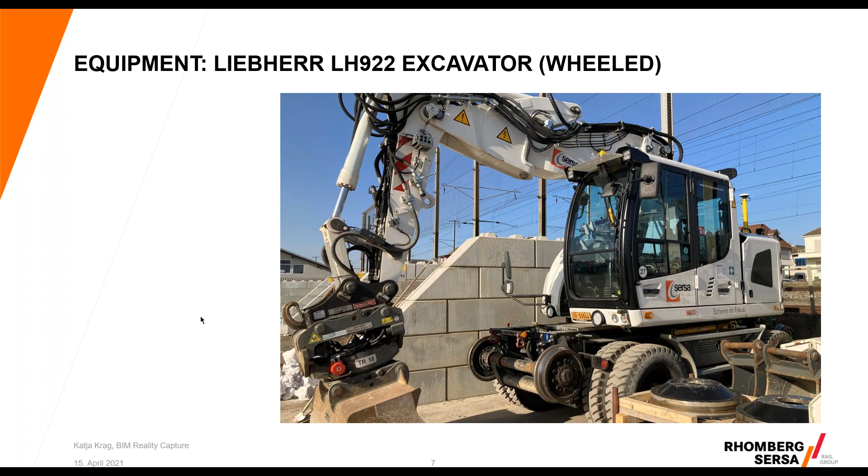And as you can see down here in the picture, this part here goes onto the rail. So these excavators can run either on the rail or on the surface. And you need to have special licenses to drive these machines, as you could imagine. So we have 2 of the wheeled ones, and as well we have the Leica iCON series GNSS, which you can see here very small on the picture, on the left-hand side, to do the as-built checks. In this case, this machine is not equipped, so they go with the GPS, do the as-built checks and tell them, hey, you have to go higher or deeper.

So a short overview of all our equipment: as I mentioned, we have the compact track loader with the Leica system. We have 2 wheeled sleeper excavators with a mobile Novatron system. We have 2 tracked sleeper excavators with a mobile Novatron. We have a small Wacker Neuson excavator, also with a Novatron system on it. And we have another excavator, a Liebherr 922 with a Leica system with GNSS on it. So all the excavators are only running with GNSS. And we have 4 Caterpillar excavators. They will be installed during the next 6 months, I would say. One is still in the factory, but the other ones are already operating out in the field.

As well, we have a milling machine, a Wirtgen W200H, and this one is also equipped with a Leica system and can run with either GNSS or total station. And then we have our famous W Plus machine. That's a special machine, somewhat our own development. The full steering of the 2D is coming from our colleagues, and the 3D part is done by an external company. On the sensor side, we have the GNSS or the total station from Leica, the iCON series. In addition, we have 4 Leica iCON total stations and 6 Leica iCON GNSS, and all that equipment is running somewhere in Switzerland. So that's also something you have to keep in mind. We have all these machines and they go from A to B very fast sometimes.

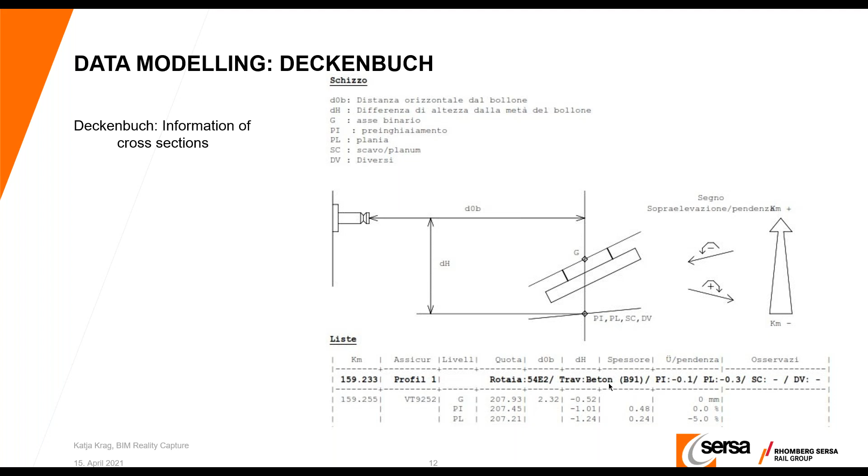So inside our BIM team, we have some modelers, and they are creating these different layers. As mentioned, we have the axis information coming from Topo Rail with the fixed points. They're not doing anything, they only convert it to LandXML because it's their own format. And they have the cross sections and information. The background map will also be cleaned and converted to a proper file so it can be used on the machines. Otherwise there's too much information and you cannot see things properly. So it also depends on colors and all these things.

So the output from the data modelers is still the axis, which will then be in LandXML format or DXF, one of these. Preferably, we like to go for LandXML. So this axis will also be converted during that time. As well the fixed points, as I mentioned, and also the background map is cleaned. But we need the layers.

So what we do is, as you can see here, B3 is the top of the rail itself. B2 is the sleeper, which could be wood, concrete, or steel, for example. And then they have to define layer B1, which is the ballast layer. Out of that one, you get the subgrade layer, and so up and down. That's done by our modelers in the BIM team or somebody from the surveying department we have as well.

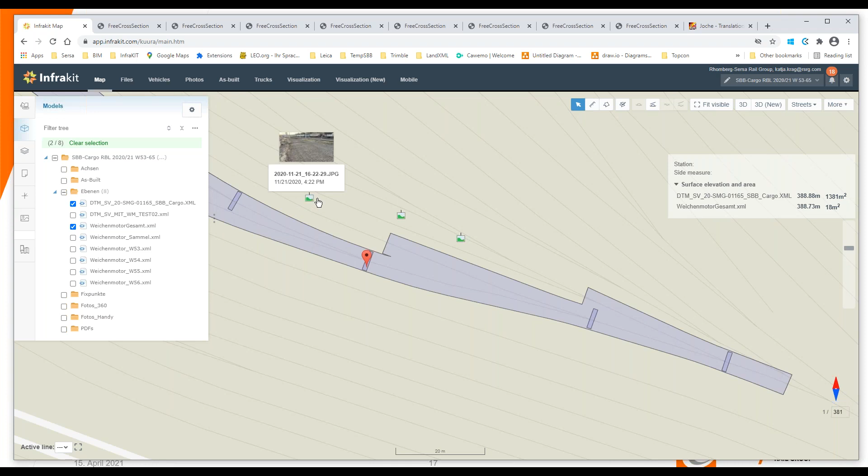I can show you some pictures here. Which one was it? So we go for this one first. As you can see, this one goes lower. The issue is they put in the engine here again, and then the ballast at the end is one surface. And I guess it was this one. So you can see properly it's only this part, and here normally the rail goes continuously through.

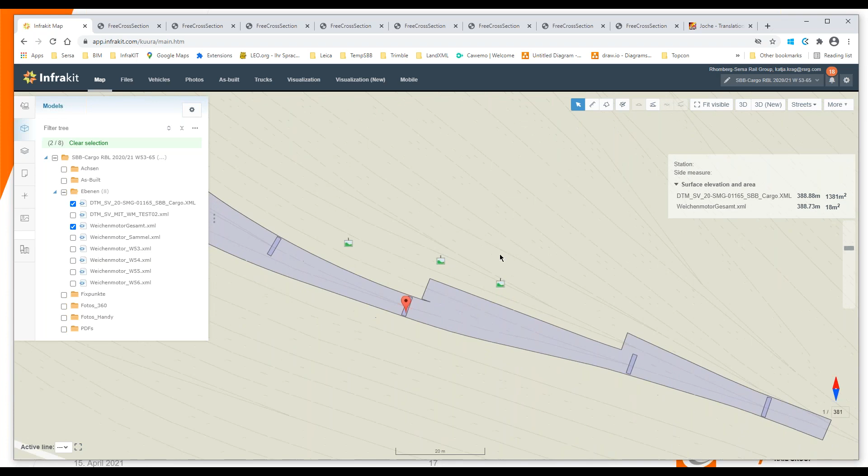So, as I said, we do this for the cross checks, for example. I'm not doing this in this project. I changed the project now to another cargo job site, which is close to Zurich.

And here you can see as well, the project is already much more complicated. This job site was done with our W Plus machine. This machine can remove the ballast, cleans the ballast inside the machine and puts it directly back in. So it's one step, and I guess that took 2 night shifts or something like this. And now you can see you have already 6 axes plus all these things where you get the turnouts and everything.

So, do I do a cross section or not? No. So this is how it looks in this case. The task for the foreman is now he's got all these axes here, and he can check and measure from the axis, for example, down here. So it's 44 centimeters, and then he needs to know what kind of sleepers do I have in there and everything. So can we do that or not? And that's where he has to shout, hey, that's working or not working.

The data handling for this W Plus machine is very different than we have for the excavators, for example, because the machine is working along an axis. So he's selecting an axis and then he goes there and runs it. This is also why we have all these different axes in here, and all the different surfaces. But actually we have a workaround now because we decided to put everything in one model, but depending on how we designed the software, you only grab the axis and the software grabs directly the models to it as well.

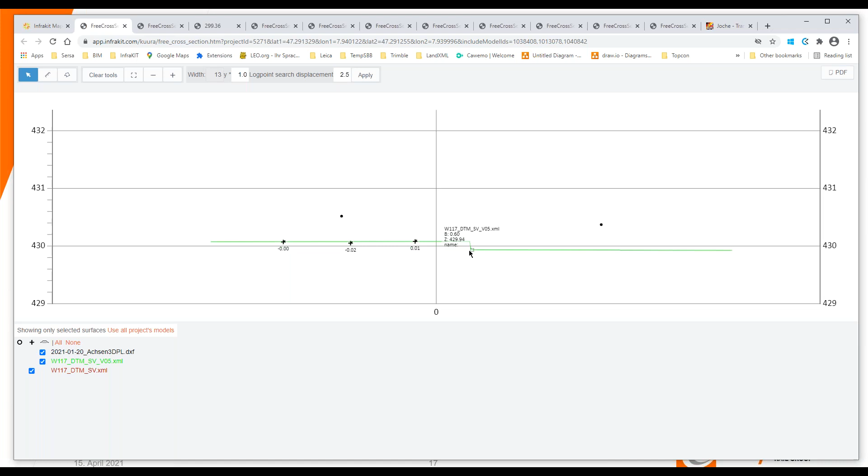So another challenge, as you can see, that's only a small list of my projects. I have a project in Zofingen, which is already done. That was the first model which was done, and there we had this issue, especially that the surface didn't fit. If I show the cross section here, it looks fine in this case, but moving forward, hang on. If we go here, for example, then you see these jumps, and they are not allowed here in Switzerland. So the model needs to be changed, and it would have been worse. Before, this model on the left moved over more to the right, and this one moved over. So this is already the second version we did.

You can also see the known points here. For example, if I go here, we get the information. Okay, that's one of the fixed points. Its name is 33 because it's the mast 33. So you have all these points in there. And because of the code 305, we know that it's one of the masts, as an example.

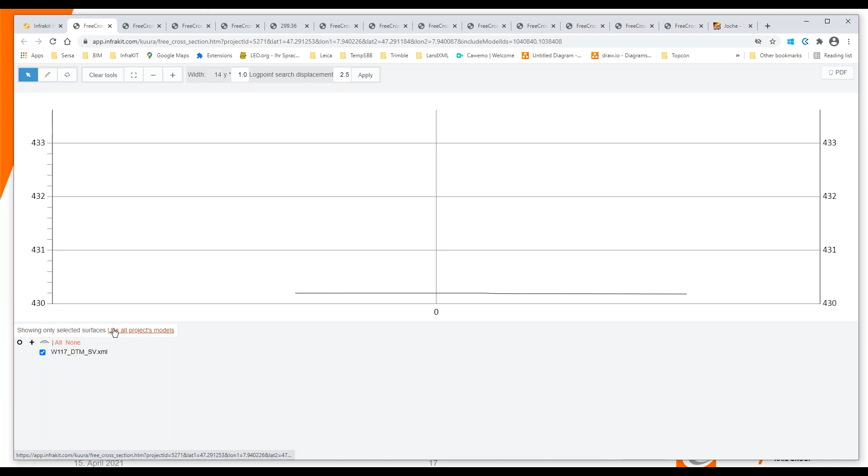So at the end, we changed the axis to a proper LandXML axis. And I remove the model here and take this one. Now if we go here and check the model, it looks different. I haven't selected any axis. And if I go in here, you can see what happened, it's now very smooth. This is how it has to be for the machines, because the machines running afterwards, the tamping machine, also need a proper surface before they can go.

So last but not least, that's all the normal gauge systems. I'd like to show you how Luzern looks, which is now the big project we are doing, and we just received some data yesterday. That's the central station here, and it's nice there because you have the lake directly beside, but you don't have time to go there. So that's all our known points. We have some parts here. That part is already prepared, but needs to be cleaned as well.

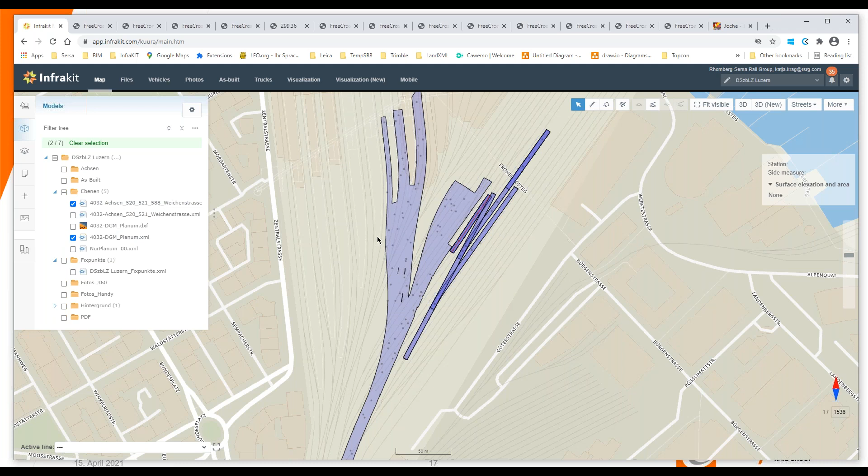Yesterday I just received some data for that part, and if I switch that one off again. In this case, we are not responsible for the data, that's done by external people, but you can see already we have these different layers overlapping, and we have only one axis inside. So we need a cleanup of all this data now, and I need to talk to these guys. So this is how it looks.

Now you have to imagine the foreman has to think, okay, that's my axis, that's my offset, and I have different surfaces underneath. And I just learned yesterday on this project, in this part here, they have 4 or 5 different profiles, depending if it's normal gauge, narrow gauge, if it's on a turnout, which turnouts, which sleepers are used, and so on.

So, that are most of the things of the challenge. So I'd like always to come to the end of my presentation.

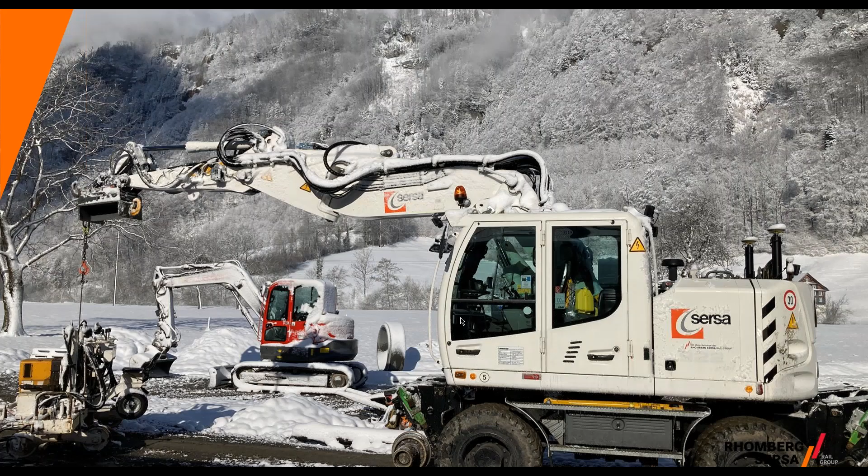Sometimes this is how job sites look like here in Switzerland, but I imagine in Scandinavia it's similar. This happened just overnight, from Easter Monday they had plus 15 degrees, and the next morning it was minus 7 with snow.

Leica is a very old organization. Here you see some history - it basically started with Kern, a long time ago. But Leica itself originated from Wild, and as you see, it was established in 1921, which means this year we're celebrating Leica's 100 years of existence. So there will be a big party by the end of this month. Hexagon is a little bit younger, but today we are pretty big - worldwide more than 21,000 employees, with Leica being one of the biggest working companies with around 4,000 people. For the Benelux, I have around 65 colleagues, some in sales but a lot in support.

I'm first starting to focus a little bit on the products. We produce quite a lot of products which are used in machine control or heavy construction environments. First of all, the easiest ones, which you can buy on the website from a lot of shops, are the DISTO products. It's a measuring tool used for measuring distances or setting out, so it's a lot used in building and construction.

Then I think one of the most known are the Captivate solutions, which surveyors around the world are using. Our most interesting one nowadays is the GS18i, the newest one, where you can not only measure, you can also tilt the pole, but also take images which you can use to collect data and measure later on in the pictures.

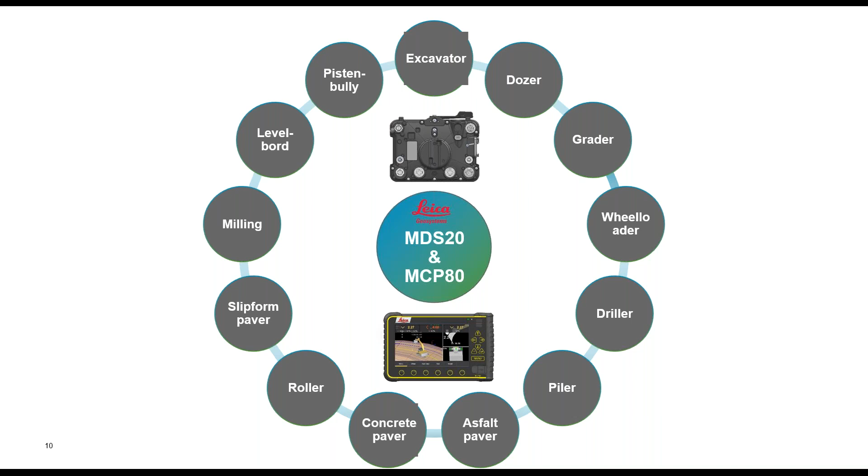If we go first to the machines, I think the most interesting part is that we have one docking station that fits on all types of machines. And on that docking station we have one panel. That panel can be used on all types of machines running all the same software, which means we can have excavators running with the MC1 software, and dozers running with the same kind of software. You can easily change the panel from one machine to another, and it automatically recovers all the settings from the docking station. So even if it's a new panel, it automatically retracts all the settings and calibration data from the docking station itself.

So all this type of machines - you see here the wheel loader, which is not commonly used around the world for excavating, but in the Netherlands and Sweden, the wheel loader is more and more used instead of a grader, so it's a very common machine in our earthworks. And then the piler, the drillers, but also asphalt machines and the skid steers, as Katja also showed.

What do we install in an excavator? Well, first of all, we install sensors, and these sensors are not only measuring the angle but also the accelerations, to correct for sudden movements and stuff like that. On top of that, we have the docking station where we put the panel, and we have GPS positioning, but it can also be a total station if you want, to have the global position of the machine.

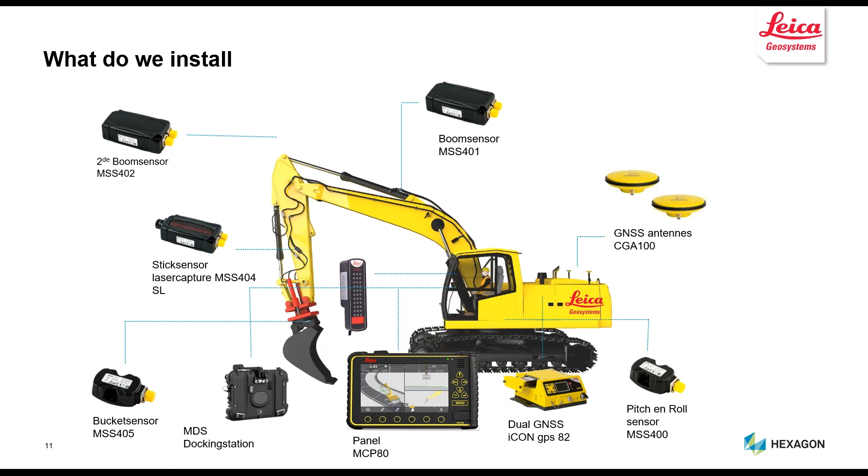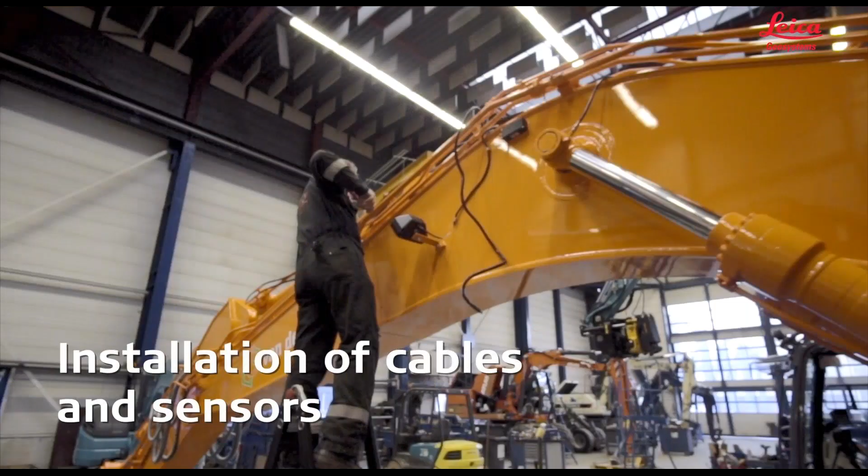And here we have a small video where we are already installing it - unfortunately, no sound for you. But here you see the whole process of what's happening. So if we get an order, we go install. Nowadays it's more and more at the location where it's a new machine, where we do it at the dealer itself - in this case it's a Kobelco dealer. We put on all the cables, all the sensors.

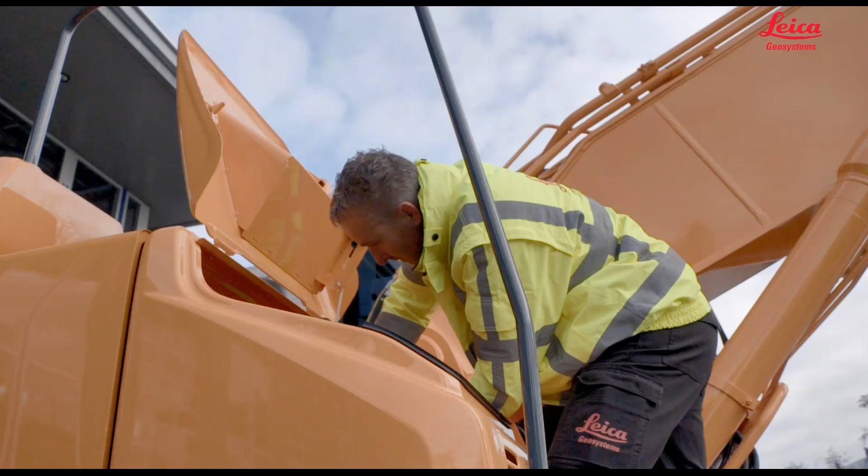Here you see they start measuring the system. We do that always with prisms on the machine. We have a special software for that one. It's called the Icon software, but there is a module in there where we can calibrate the machines and get them as accurate as possible. And when we're done, we put a sticker on it.

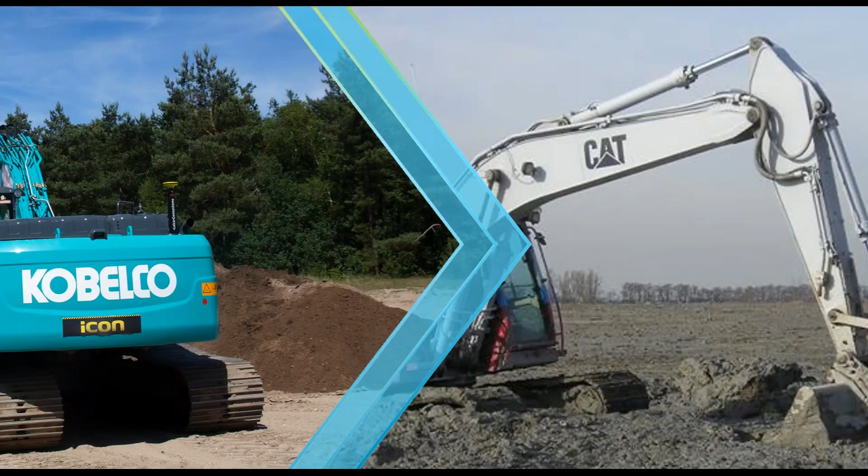Yeah, okay. Here comes the support. I'll come to that later on. So in the old days, we were doing like this. We had a surveyor staking out all the points, and nowadays we're moving towards having the system on the machine where the operator can see everything he's doing. Yeah, and we don't need a surveyor on the job anymore.

It's the same when we go, for example, concrete. In the old days, we were all putting on strings to set out where they had to go. And the strings are always a lot of work to put up, but they're also a risk because someone tumbles over it. And nowadays, what we try to do is do it with total station, and here it's a one setup, so you can even run it in combination with GPS. And these kind of machines are running now without any string in the field. And that's something this is also put on other machines.

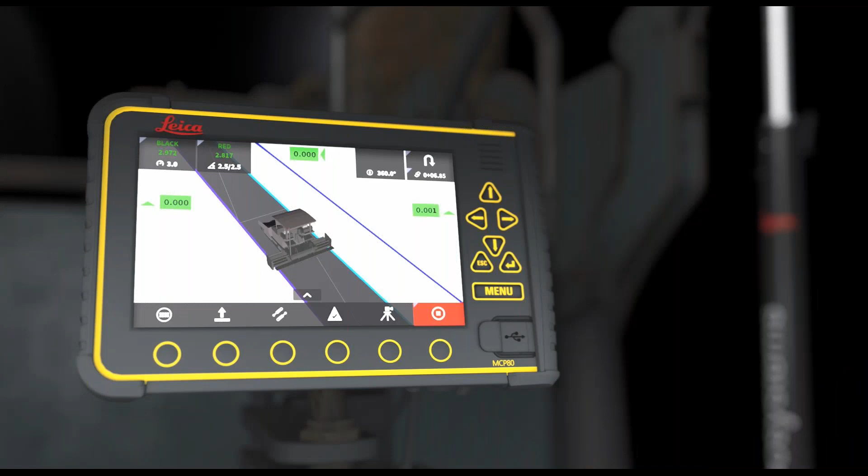So the same software, the MC1 software, can be used on concrete pavers, asphalt machines, and also on milling machines, where we are running these virtual string lines, which we can make in the office and send them to the machine. And the string lines on this kind of asphalt machines are not only used for the height, but you can also use it for the direction of the machine. So it's automatically steering if you have a Vögele machine, and it's also automatically adjusting the screed width.

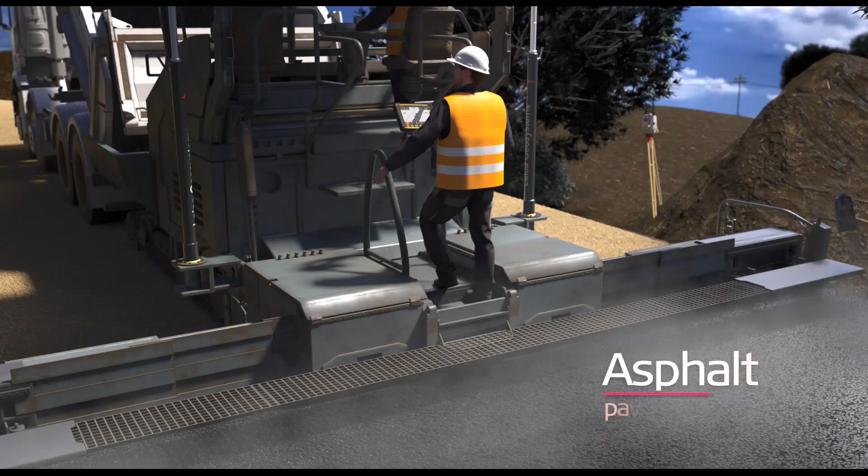So you can create the model, put it in the machine, and then let it completely run automatically and adjust all the heights. And as you see, you can use it with one mast, but that's only for the smaller machines. But most of the time they're using it with two masts, so you have also the direction set. So here they're going to show you that they have a wider setup, more than 6 meters, at least two masts for the accuracy.

Okay, then we come to the next product, which is called the Pegasus. So if you want to measure the as-built before, for example, you start to do any new design, or you want to measure as-built or your clearance of roads or whatever, you can use the Pegasus system. And this one is collecting a lot of data, really megabytes of data. So it's a scanner on board together with cameras, which makes it a complete point cloud, which can be used to measure volumes, to make your design, to see if your design fits in the actual situation.

And we have really customers using this on a daily basis where they run over the project to monitor the progress, to see the volumes, to calculate it from there. So instead of using a drone, you can also use this kind of machines or kits to do this kind of as-built checks. And here it is how it looks like.

So on the left side, you see the picture where they measured it, and because of the cameras we have, you can collect all the data colorized, and you can measure details inside it. Even though you're driving maybe with your car up to 60-70 kilometers an hour, you can still have an accurate position of 1 to 2 centimeters. And that's the absolute position; relatively, you can have it even more accurate. So you can measure cracks in the road to see the size, without being on the road itself.

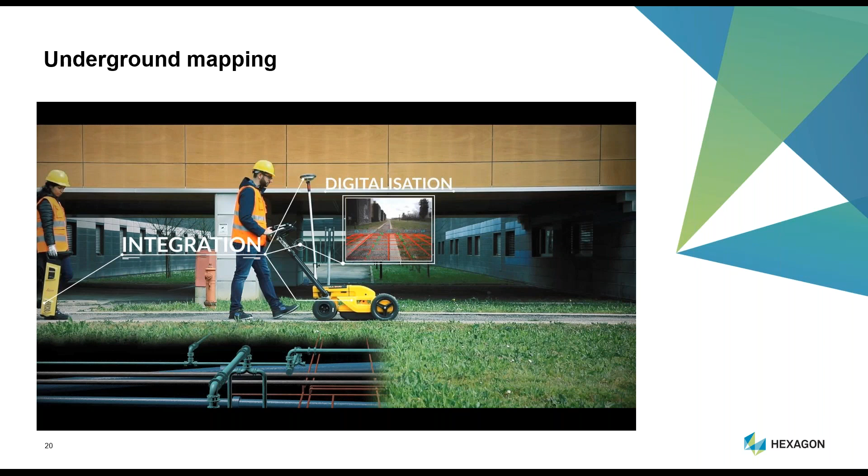Then we have the underground mapping. So we have the ground penetrating radars. We have different ones, and some of them, even the DSX, are made to work together with machine control. So you can measure and see what's in the underground, and then directly upload it to the machine. So if you found a pipe or a cable which has to be protected, you can directly upload it to the machine as an avoidance zone. So the operator gets a warning the moment he gets in the neighborhood of this pipe or this cable, so you can be more careful and not hit pipes and underground infrastructure.

Then we come to the Icon and Captivate lines. So we have two different lines. Captivate is designed for surveyors and is capable of doing everything a surveyor wants, while the Icon line is made for professionals working in building environments who need to do measurements. So it's completely different software running on it, but it is made for people who want to measure and stake out in building construction or earth moving. And the good thing is both of them can be used together with Infrakit. And now we get a short video with an overview where you see how it is all connected together.

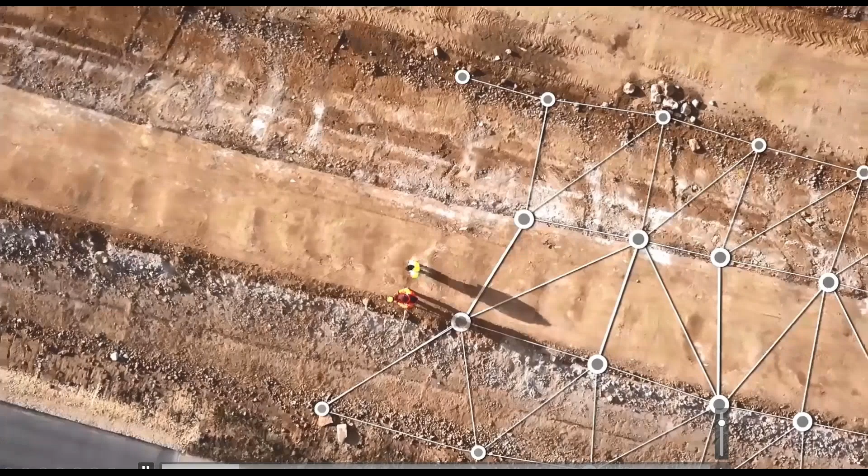So we see the excavator running on this model. We can see the GPS, where you can use it as a base station, where you can use it to measure the points as-built. And all that can be combined later in the office.

What is all connecting us? Yeah, so inside Leica we got ConX, and ConX is our cloud data synchronization system. So all the equipment you saw can be used to upload data, but not all of them directly. Some of them you have to be in the office, like the Pegasus. That data is so huge, you have to work on it. But all from Captivate, all from MC1 systems, everything is connected to ConX. And ConX is our cloud service, where you can upload models, visualize models, and download models to the machine.

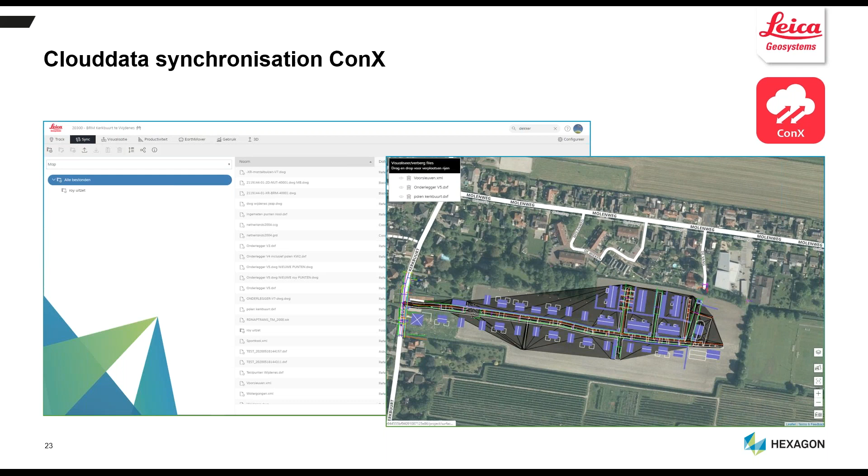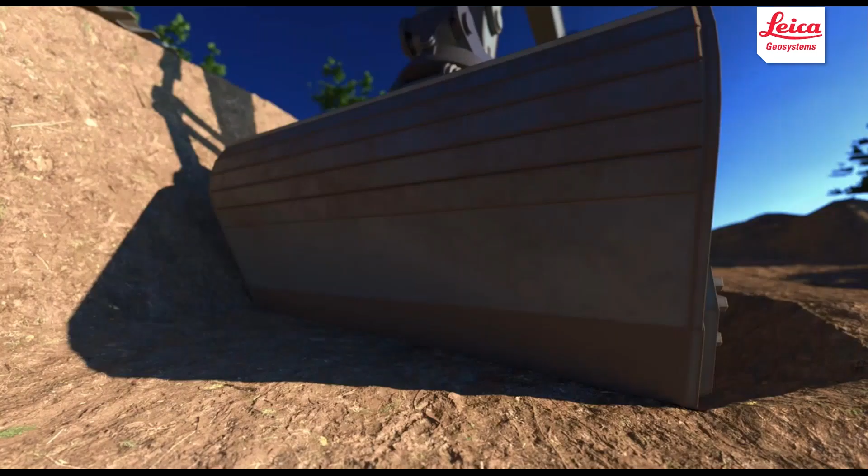And that's what we're showing now in our movie here, the seamless integration. Yeah. So data which is stored on ConX will automatically be synced to the excavator, but can also be synced and downloaded to the field controller and can upload it. So if an operator measures points as an as-built, like he's doing now with his bucket tips, that one is automatically uploaded to the cloud or shared between other machines if you want. And in Infrakit you can use this information, but I can do that later on.

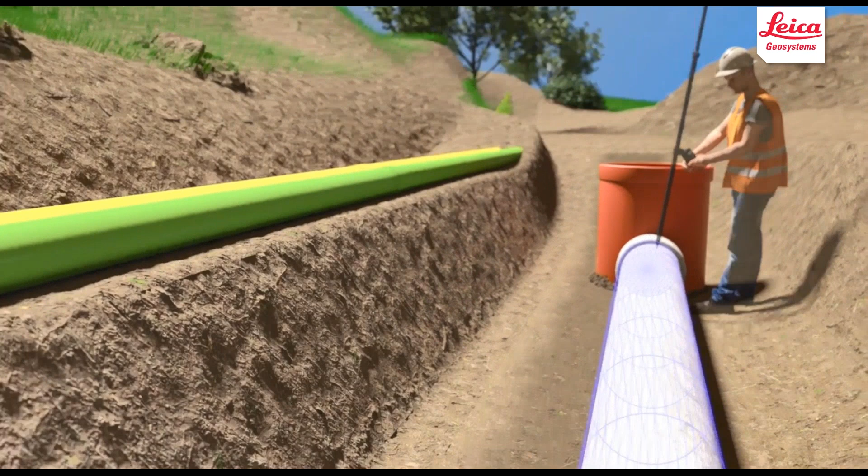And Leica is always using open standards, so we don't have to use the Leica format. We can use LandXML to be uploaded to the machine, and you're directly working on that one, or you can even use DXF files to work on that directly. And that's from the Captivate, from the iCON side, from the MC1 system.

Okay, so what you see, from design up to the maintenance, we can use ConX to connect to our machines. But we also know that on the job site, it's not always Leica. Something we do hope, but it's not always like that. And there, I think Infrakit becomes a major cooperation partner for us. Where ConX is just syncing files and downloading, upgrading, Infrakit can do more, and they can also connect others to it.

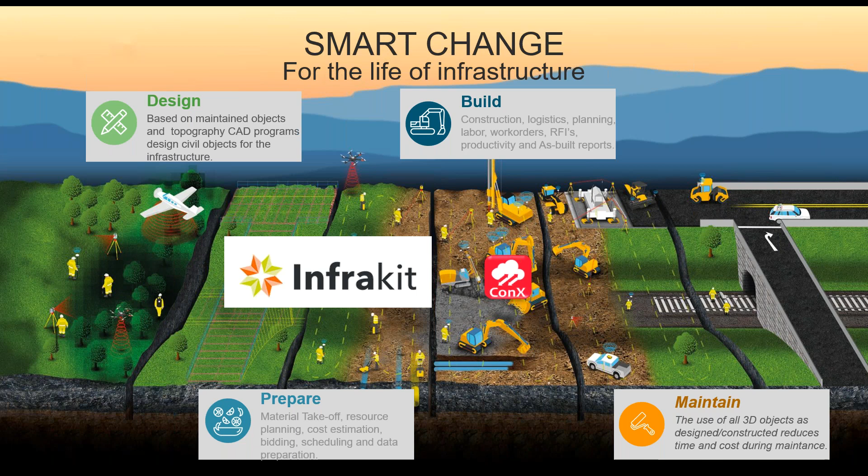So in the complete workflow, we have the design we put to the machine or anyone outside, and it can also be the foreman measuring things. Then we get the as-built data, and that all is collected together, and it's a kind of circle going around. And that data you can design and create in Infrakit, move it to ConX, sync it, and from there it's coming to the machines automatically. And that's what a lot of customers in the Netherlands are doing.

For example, Heijmans, a very big contractor in the Netherlands, they're using Infrakit on a daily basis, where they connect not only their own machines, but also machines from subcontractors, and they're working together. They use auto logging options in the machine. So the operator is trained and forced to measure everything he's doing. And some of them, because they're doing it so often, asked us to put special buttons in the joysticks to make the measuring a little bit easier.

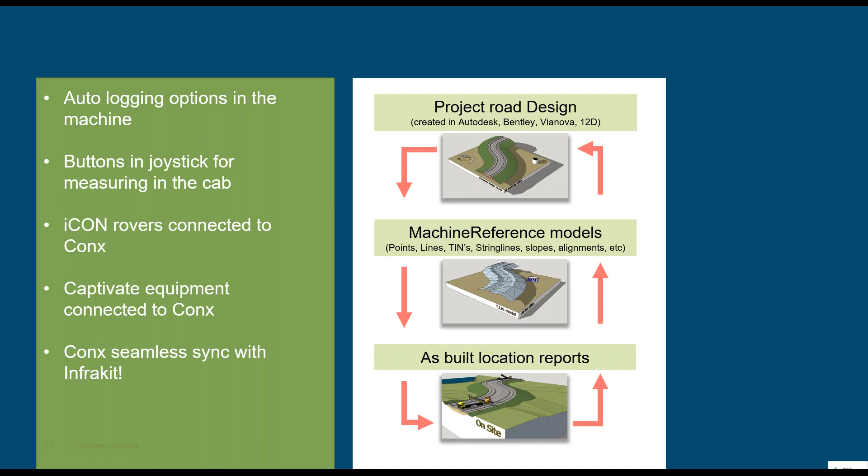And all iCON rovers or Captivate rovers can be connected to ConX. And from ConX, there is a seamless sync with Infrakit. So there is our cooperation, which is very fine. And here is a little bit the picture of how it looks. So Infrakit will be the main platform on these kinds of projects, where ConX is one of the vendors who is integrated. And from there you go to all the machines, up and down. And there I think Infrakit can be a very good solution, especially on mixed projects, where you have more brands than only Leica.

That was it for my presentation. Are there any questions? Thank you, Ronald. It was a really great presentation, and we have two questions here. I have one personally, and then another from headquarters from our product vice president. So let's start from that.

So if you think from the customer point of view, which is the most trending Leica technology for 2021, where the customer gets the most benefits? So the Leica technology for 2021, customer receiving the most benefits.

That's a little bit depending on the customer. I think if you're a contractor and really working in earthworks, you should invest in MC1 systems on your machines. If you're a surveyor, of course you should invest in the ConX connection so you can work together with Infrakit, if you don't have Leica already. But if you do have Leica already, you can just easily make the ConX connection, and from there you can cooperate on all these kinds of projects together.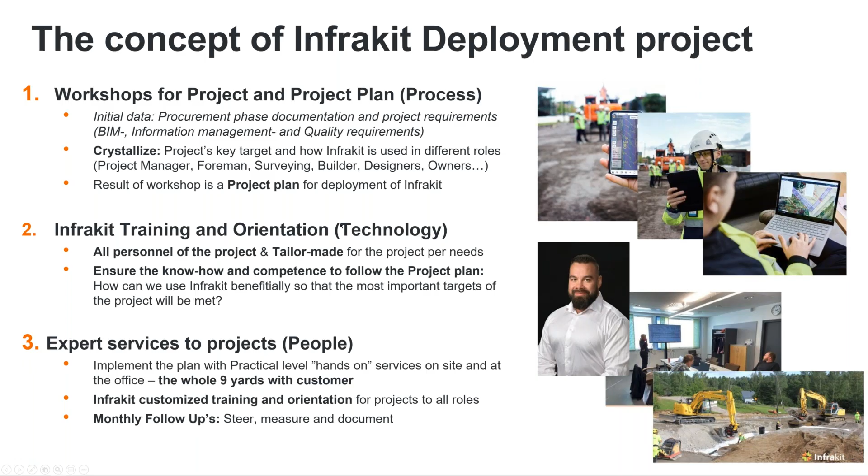And the interesting thing is how, based on our experiences within the 18 months and 50 projects, we deploy that project plan. And it really is that the project plan has been executed by providing the expertise where the real work is done. So in this slide, for example, you see 6 different pictures, and all of these pictures have been taken from our customer cases. So you can be sitting with the foreman and machine operator in a construction booth figuring out how and in what order you will do your next area.

You can be figuring out with the owner, the lead designer, and the contractor what we have designed and what is to be built during the next 2 weeks in the design meeting. And it can be that our expert will be on top of a roller or an excavator, making sure that we have the optimal data flow from Infrakit to machine control systems. And then again, it can be a training session. It can be our expert making sure that the supervisor and foreman know where the bridge foundations will be built. So we are providing support to the real work that is being done in the projects.

So now we move on to the customer cases. First, I will talk about a customer, City of Vantaa, and I will have a few different perspectives. First, I will go through the use of Infrakit from the perspective of the builder, the actual builder. Then I will look at the project's development of construction quality as a whole.

So the next slide illustrates the scenery from Infrakit. So for example, how you can detect and visualize these final design plans in Infrakit. You would need to have these DWGs as a builder, and then you would have, for example, these well cards as PDF files, which are final design plans. So next, I'll jump into our platform. I'll log in to the project, and then I will start showcasing a few things.

So for example, here you can see the vehicles, but that's not important. What is important is I've saved a few views here. So this is the scenery for the foreman, for example. He knows that this is, for example, the storm water well number 153, and these are the directions and elevations of the different pipelines leaving from this well. And lots of pictures were taken there. And these were the vector files that the actual builder could use on site. And of course, he would have the PDF files here in the files page.

I will click to that same well information, what can be found from the well cards. So I just downloaded this PDF file here from Infrakit, and now we got the same thing on digitized paper. So well number 153, what's the diameter, what's the material, what are the different elevation points of the structures, what are the directions of the pipelines going in and going out from the well. So this being said, they really got all the relevant information for them to do their job.

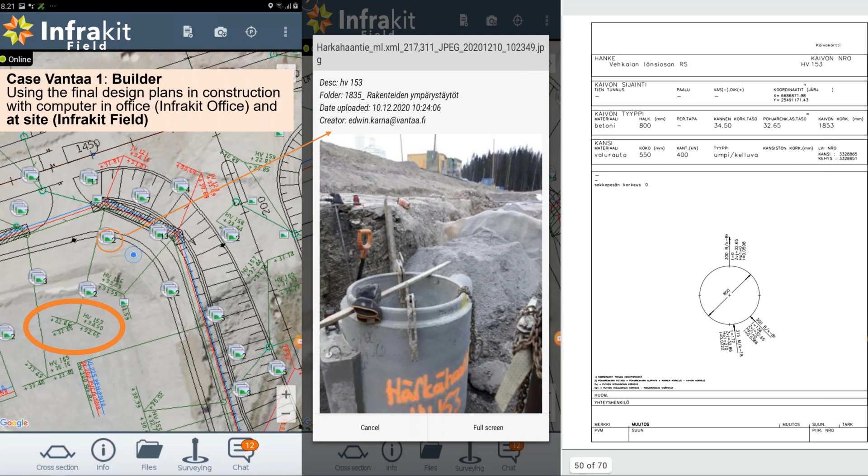Okay, and then we continue with overall quality. Furthermore, we discussed with the project personnel, what about the photos? Photos weren't always taken, and if those photos were taken, they were on a mobile device or in email. And now the new way is that we can share the taken photos with everyone in the Infrakit platform, because as we all know, one picture says more than 1,000 words.

So next I will show you a few photos from the site that the actual builders have taken. As I log back into the Infrakit map page and then look at the same views, I have, for example, this.

We left with this situation. The actual builder knows where the well is, he knows the direction of the pipelines, and when he has done the construction, he can even document it, because this is what the owner requires in this project.

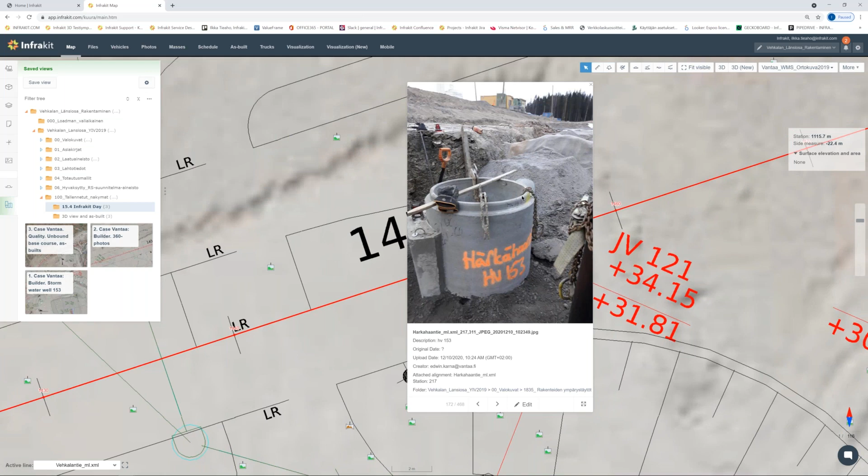So here you can see the situation. The well has been installed, the pipeline is there, the final filling is there, the filter fabric is there. It's nice to take pictures of things you have built, because those pictures often make the owner happy. And you can even take this 360 degree picture.

Here we can see, for example, some district heating cables, filter fabrics, and this is a pipeline conduit trench. Here we have some rock that needs to be blasted, maybe some stormwater excavation or culvert and logistics. This is a sewage well, and there's some clay and silt which definitely needs some supporting for the excavation. So these kinds of things you can see from these pictures.

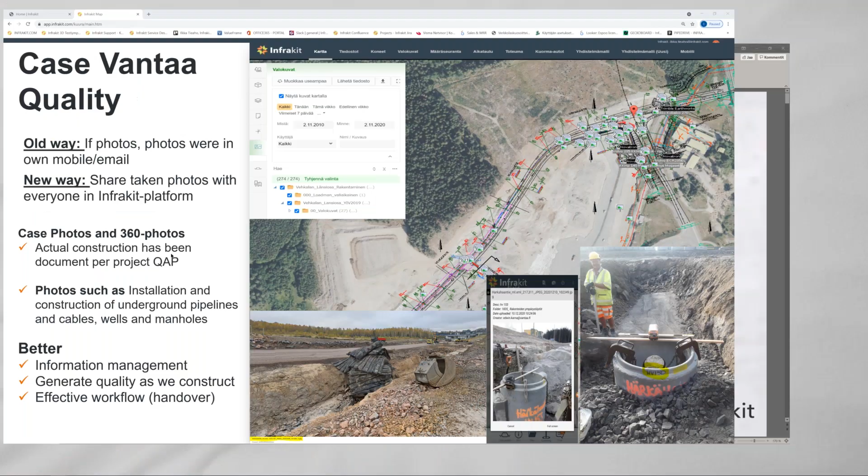Once again, while conducting it this way, we enhanced the information management, because these photos were required by the owner. We got all of these photos in one platform for all to use, and we were generating this quality documentation as we do the construction. It was a very effective workflow, so there's no need for an extra phase when doing the digital handover at the end of the project.

And then next we got fleet management. Prior to this pilot, the city of Vantaa did not have a machine control system used, and no common data platform for this machinery. At times when they used machine control, they handled the data management with USB sticks, which is not the best way. So the new way was they could share the common real-time data with all machinery.

So I will show you the vehicles page here in Infrakit. For example, here you can just click the vehicle and check the rights. Here, 'toteutusmallit' means machine control models in Finnish, and we can see this machinery has the insulation structures, the drainage systems, the culverts, the embankments, the sub-base courses, the base courses, and so on.

And for example, this other machine only has embankments, and it's doing the phase of construction which is reduced weight embankments. So we can share the needed data with all machinery, and it enables high quality because all the machines have the right data and up-to-date data to do their job.

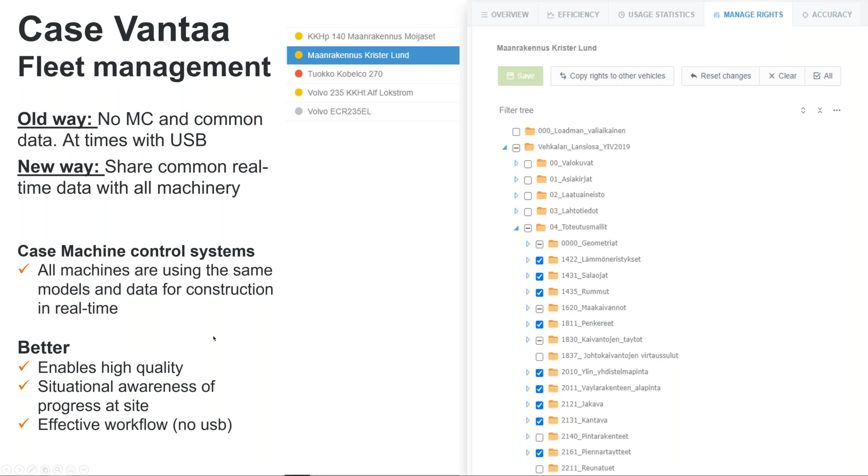It's an effective workflow, because there is high risk of getting things wrong when we are using USB sticks. Those surveying guys do not have fast enough feet to keep all of that machinery up to date.

Then some more quality stuff. So about this grader as-built points taken with total station technology, Leica MC1, points from unbound base course from grader to Infrakit. The old way was that as-built points, if they were taken at all, were sent by email to the project bank.

So now we have all relevant and agreed as-built points as part of quality documentation in one very visual platform. I will showcase you the as-built points next.

So here, unbound base course with as-built points. I can get rid of the background map so it's more clear. So this kind of job the grader did, and we can have a free cross section from here and check how the structures were actually built.

So when we have selected the as-built points from the unbound course structure, we have the as-built also. So we have all quality documentation in map, in cross section, and I will showcase you real quickly how it can be seen in 3D view.

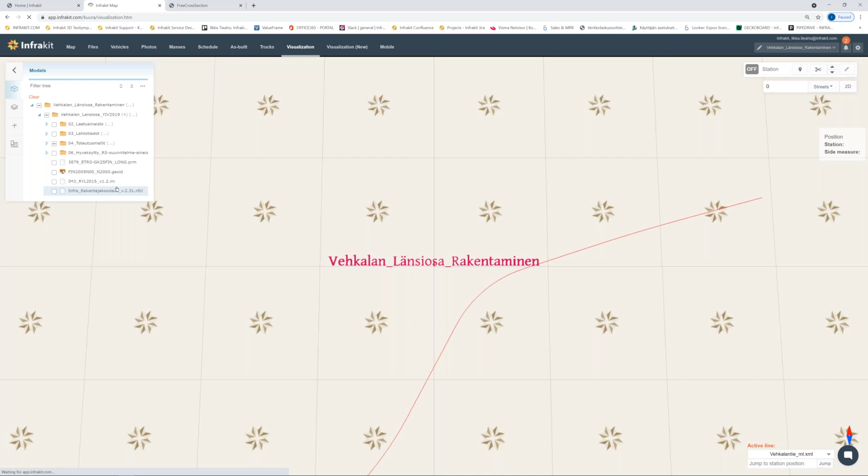For example, here I have this one saved view, and what you see here is all the information models that the machinery commonly shares here in Infrakit. Here you can see also the as-built points, so it's a very visual view to all quality documentation. For this case, the grader did this unbound base course, and here we got some excavation done by GNSS technology.

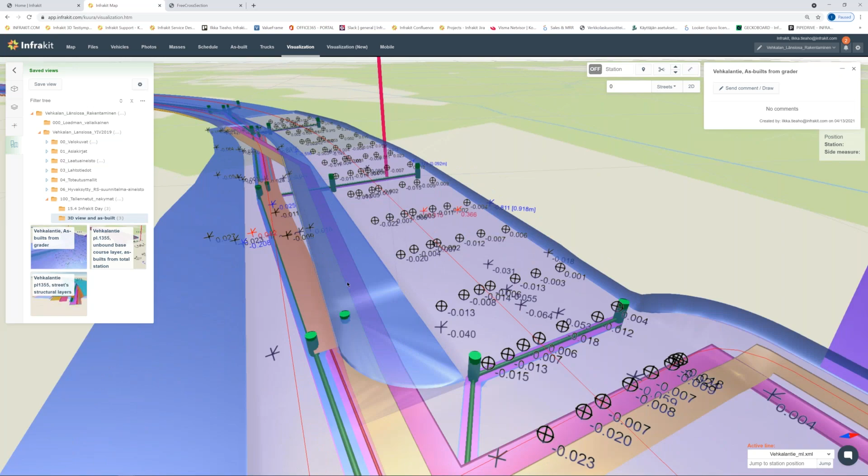Okay, I need to hurry up a little bit, it's 23 minutes done. So this means while we are using this kind of process, we got better quality management, better situational awareness of the progress at site, we know where things have been done. And again, thinking about the quality handover material, we really have an effective workflow because we are generating the quality document as we do the construction itself.

So then this is the 3D picture which I showed you guys.

The next slide shows how to enhance project collaboration by utilizing standardized processes and Infrakit in site meetings. In this case, the owner, supervisor, and contractor agreed on a process: they share the site meeting agenda on the Infrakit platform a week beforehand, and then Stara, as the contractor, can add related info from the work phase report to the agenda.

When all the actors were at the site meeting — the contractor, the designer, the builder, and the supervisor — we went through topic by topic, and the project engineer showed the status from Infrakit in a very visual way, giving insight topic by topic.

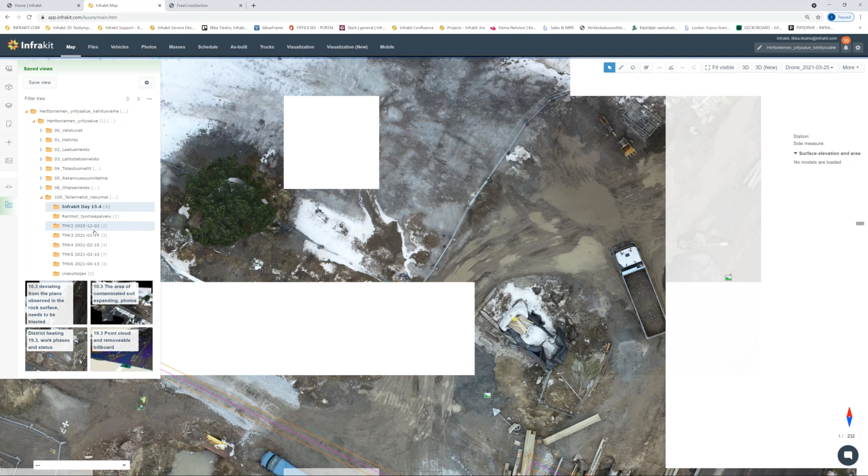Here we've got all the site meetings. For example, on the 10th of March, the project engineer showed 7 different topics in the site meeting, so everyone had a crystal clear understanding of the status of the site.

And here I saved 2 views. For example, here we have a deviation from the plans.

We had a site meeting on the 10th of March, and before the meeting the project engineer went on site taking a few pictures. For example, here, this added work occurred because the design assumed the rock surface would be far below, but it's actually right at the surface, so it needs to be blasted. This is how the project engineer communicated this deviation to all project parties.

And this is a second picture from the same situation. There was unexpected rock, and some special arrangements had to be made with the water pipeline and joint structures there.

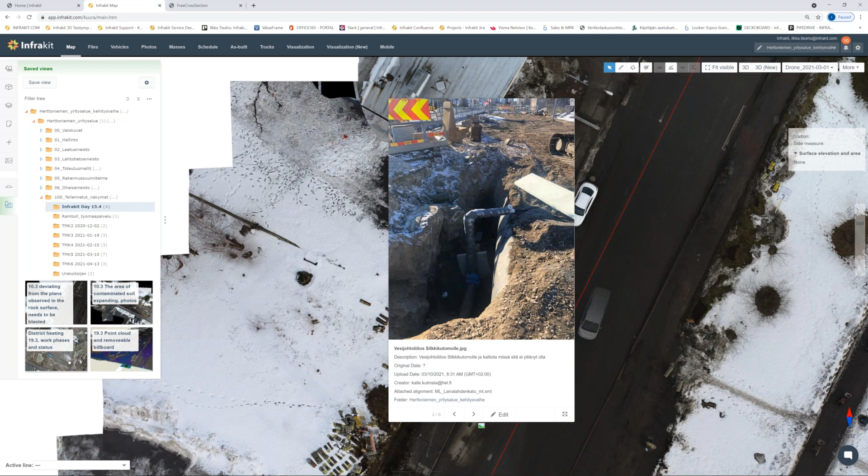And the second use case is the district heating work done on the 19th of March — what's the work phase and what's the status?

So the actual builder, once again, took a really nice picture which tells us what we are doing there. There's a long description of the work in Finnish, but it means the district heating pipeline is being constructed and the filling is done with stone ash. In the picture we can see filter fabric below the pipeline, and the final filling will also be done with stone ash.

The work phase was conducted by Leo Riikonen and Eero Hanninen, who took the picture, along with a machine operator from the subcontractor. So this kind of information can even be reported by the actual builders from the site.

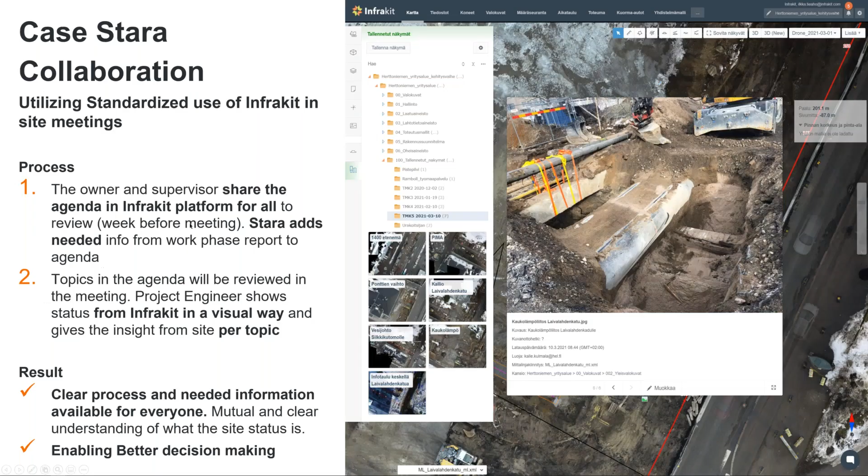Now I have only a few minutes, so I really need to speed up. I would have another example of Stara collaboration, but I'll give you only this one — they have all the relevant information in Infrakit, as you can see in the list of documentation here.

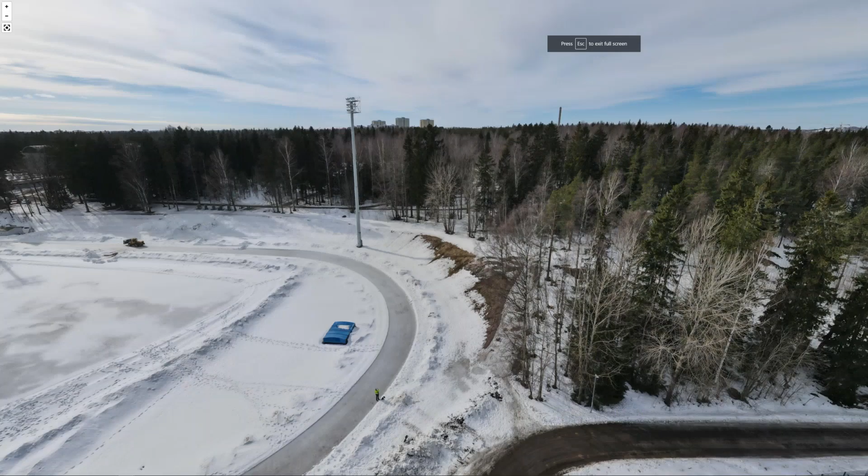What they found very useful was using Infrakit, standardized processes, and new technology like the drone and 360 camera, in site meetings. This was found very beneficial when going through the different work phases and the status of the construction site. You can clearly see — this is a fairly small site — everything that's happening on site at the moment. Okay, I have to jump back to my presentation.

Now, to get back to where I started — what is our mission? Our mission is to ensure that our customers succeed in their projects, and based on our experience with customers so far, this mission is implemented by providing expertise where the real work is done. That's the recipe for us all to succeed.

These actions will lead us to having successful infra projects in the end. This way, the customer gets the full potential out of Infrakit, with very productive design and construction processes and effective data flow between data, technology, and people. The customer's projects will be on time and under budget — we can be productive in a sustainable way.

You can find some case studies on our website behind the blog, where we've achieved results on time and under budget.

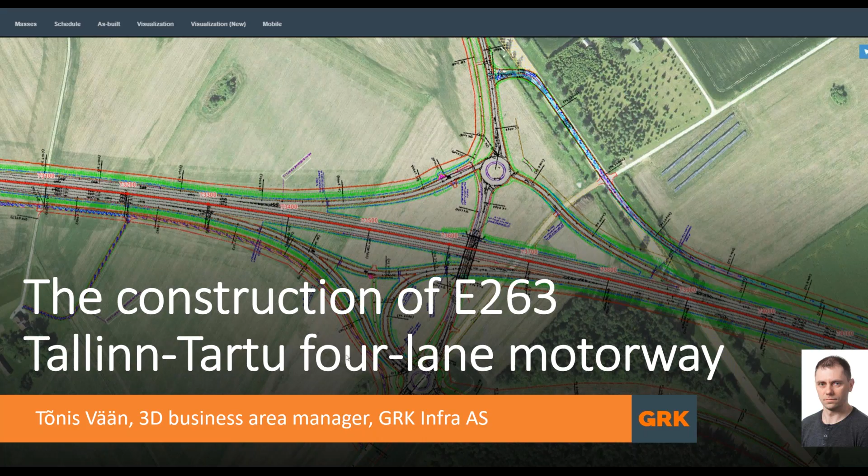As you can see, the construction area is in the middle of Estonia. Here you can see about a 16-kilometer long main road, start to end. It has 5 main junctions and many smaller structures. Here you can see an overview of those areas. There are 3 main road viaducts, 2 bridges, and 1 animal overpass, what you can see right now.

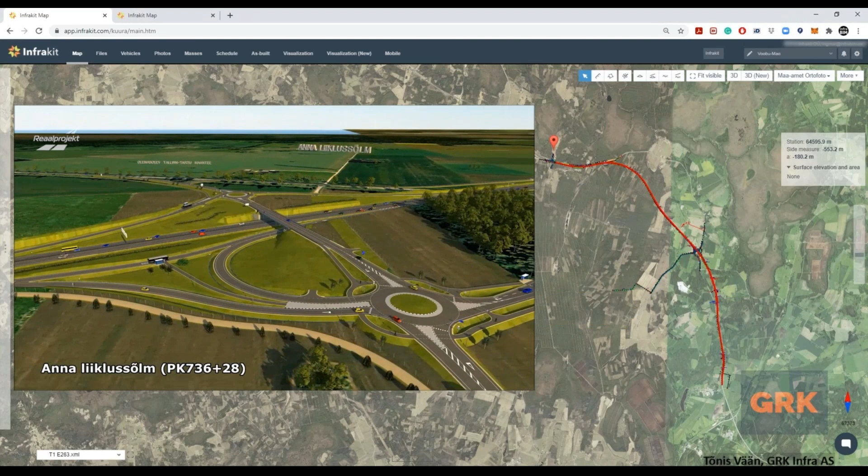On the picture you can see the current situation. Main road junctions are at 2 levels. Here you see the biggest Anna intersection. Of course there are a lot of smaller structures like noise barriers, ponds, local and pedestrian roads, and so on.

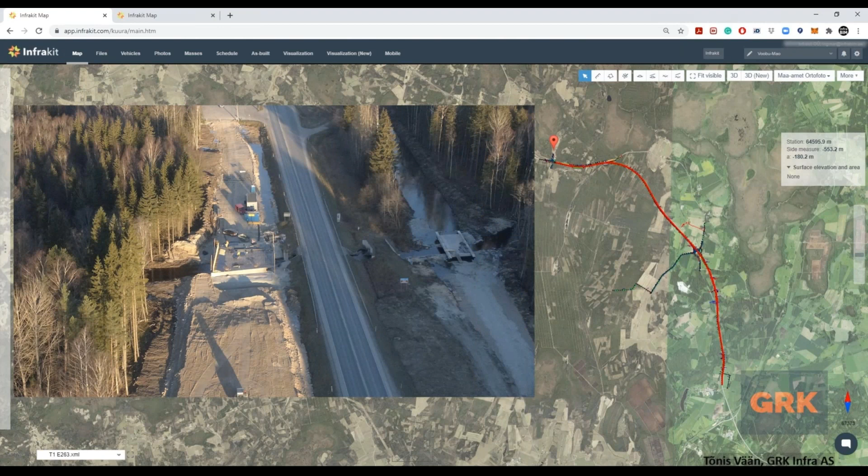I'm not going to talk today about all these technical details. I have chosen some of the bigger areas. Let's take a closer look now at the Puiatu animal overpass, how it looks, and what we do in Infrakit.

And how it looks on the construction site. As you see right now on the Infrakit map view, it is really easy to get a quick overview of the site. You see combined design 2D drawings with 3D models and the reality situation by using an orthophoto underneath. If we click on a model, we can quickly see the model name and 2D area.

We can also do our freehand cross sections wherever we need, turn on all surface models, and take a closer look at the situation. On the cross-section, it's really easy to see all the models, take different measures, and also check absolute level and slope.

On the map view, you can also look at all the pictures made by the object team, using cell phones with the Infrakit app, sometimes also drones. To understand better how the 3D models look and to check if they're correct, we use a 3D visualization tool. This tool also helps create the situation when the design models and existing ground model are turned on.

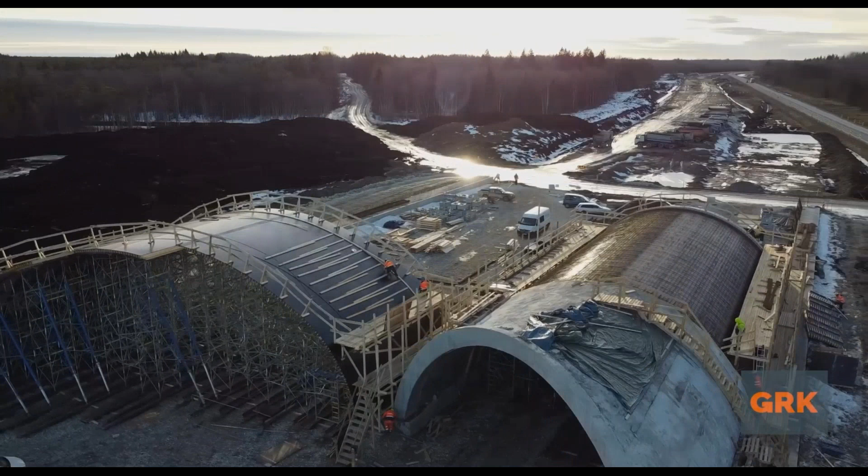Here you can see the reality of the construction site. There are going to be 2 concrete arcs, and if I remember correctly, on top of these arcs there's going to be about 10,000 cubic meters of material. To finish this Puiatu animal overpass, the total amount of earthworks is over 200,000 cubic meters.

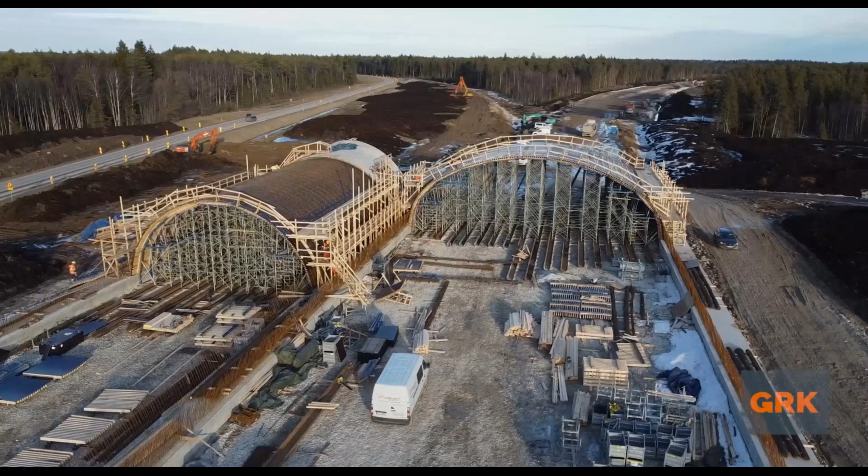So let's now take a closer look at the third main junction, called Anna. On map view again, the same. We see how 2D drawings have been combined with 3D models and reality, again using an orthophoto under these drawings. We mostly use 2D drawings to make cross sections in the right place, depending on what we want to see on the cross section.

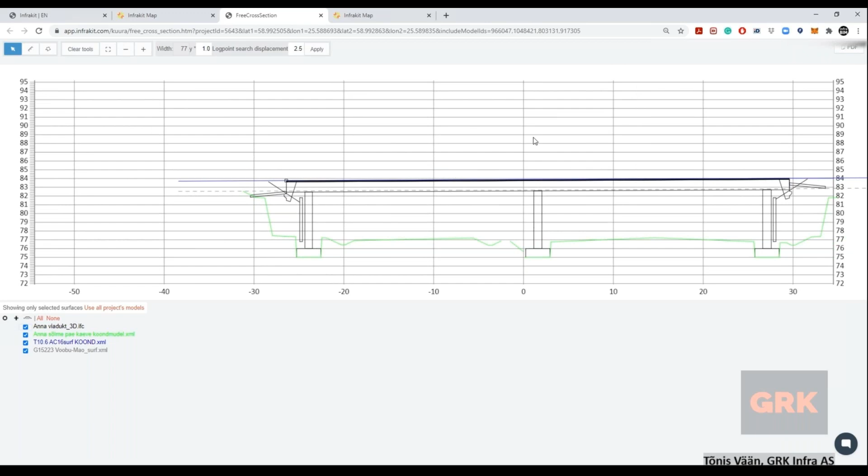This is how we check whether the viaduct IFC model and LandXML models are coordinated correctly. Taking measurements, absolute heights, slopes, this is basically what we do every day. Here is another cross-section example. Here we can check the road asphalt level. Here you can see this blue one is the road asphalt level surface, and how it connects with the viaduct IFC model elevations.

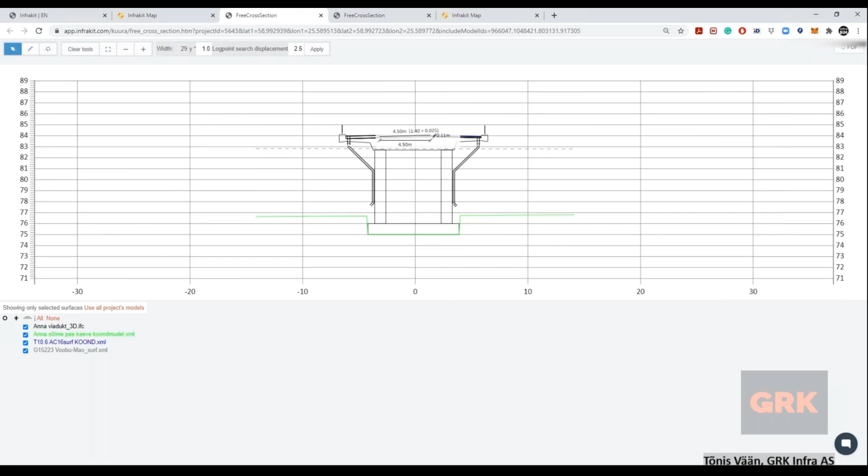Again, here you can see how we use the visualization tool, which gives a good overview of whether there are any model errors. Here we see the designed LandXML model and the viaduct IFC model. To understand and check models more accurately, for me it is important to see the wireframe of surfaces for detailed geometry.

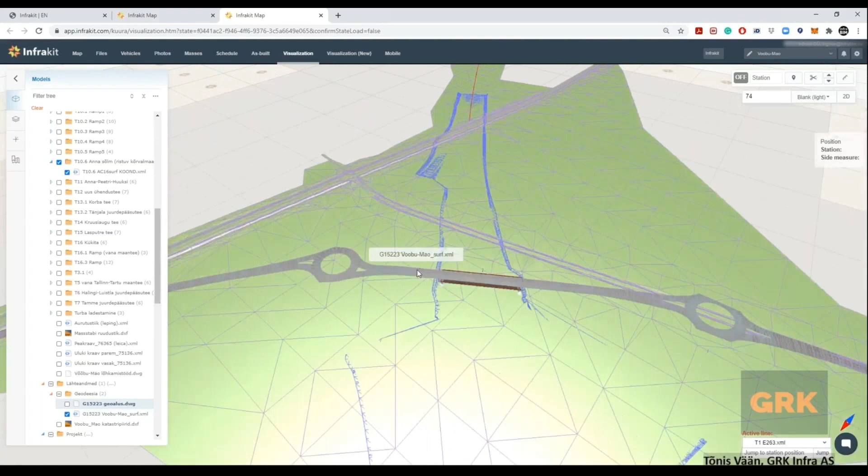And if we turn on the existing ground model, then we see that a lot of material needs to be excavated. This excavated material is limestone. If anybody noticed already on the cross sections, the main road surface in this junction is going to be under the existing ground.

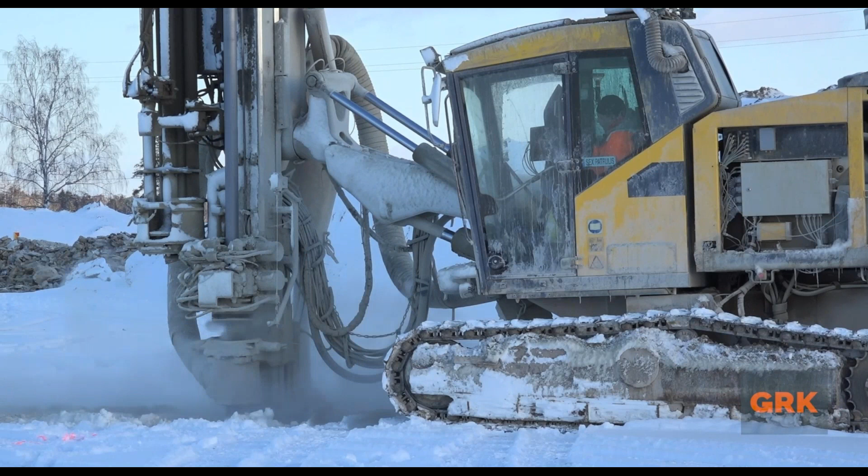And if we take a look at the construction site, we can see all the explosion work that needs to be done. It's about 220,000 cubic meters of limestone that has to be excavated. It's actually such a good material to use, because we have many road parts where we have to excavate unsuitable soil and refill with suitable material. And here you can see the explosion works.

Okay, and here I wanted to show you one main road area where we had to excavate unsuitable soil. If we do a cross section, we can see the depth of excavation. When we turn on all models, we can see how it's supposed to look finally, and of course we can take different measures.

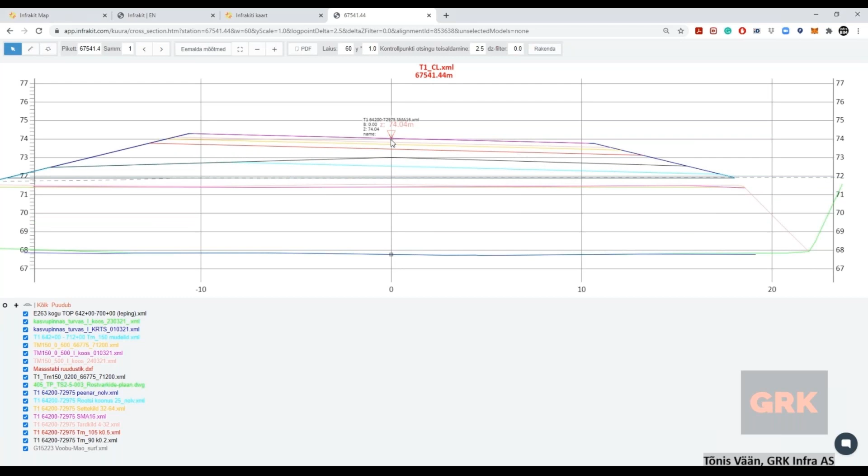On the construction site, most of the limestone excavated from the Anna intersection is used as filling material to replace the unsuitable soil areas, which is about 1/3 of all needed backfill material, and all this unsuitable soil is excavated. In total, about 600,000 cubic meters.

And here is again the Anna junction. Here I wanted to show how we can get a quick overview of the 3D design and as-built model. These are the Anna junction limestone models. The pink one is as-built and yellow is the design model. If I want to look at more detailed geometry, we can always do cross sections and turn on the model wireframe.

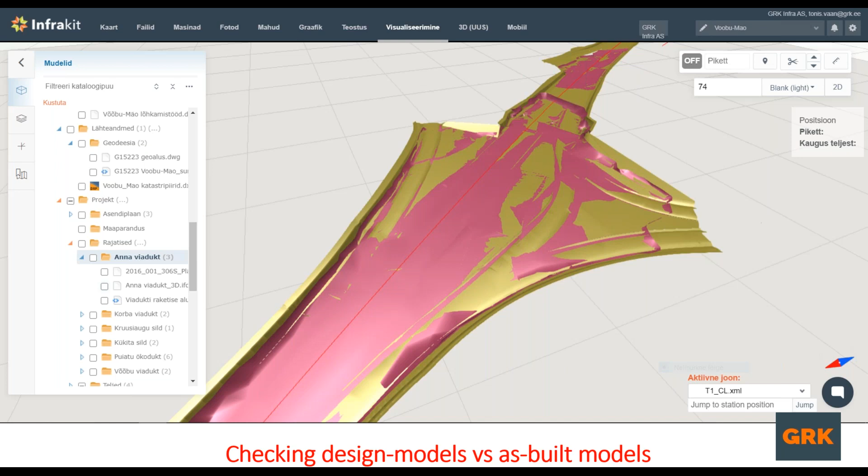And here is my conclusion about using Infrakit. Why we are using Infrakit is mainly because we can have a quick and really good overview of the object, especially when the object is quite big. If it's small, then it's easy to handle with everyday programs. When it's quite big, then it's good to have this Infrakit environment.

All project parties are in the same common data environment, like I said. And they can see at every moment what has happened, what has changed, and also if we upload or download new models, drawings, and everything. Also orthophotos and pictures are really good material. For the project team, the smartphone app also really helps them to position on site and take a coordinated picture if needed.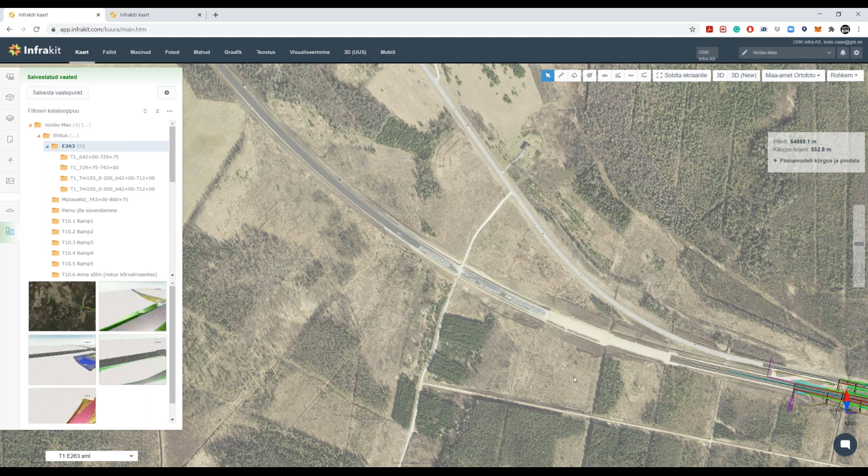If we take a closer look, here are these viaducts and junctions. Here's going to be this Puiatu ecoduct, an overpass for animals. Here we had to do a lot of unsuitable soil excavation in this section area. And here is this biggest junction, or not junction. And also we can take a look at,

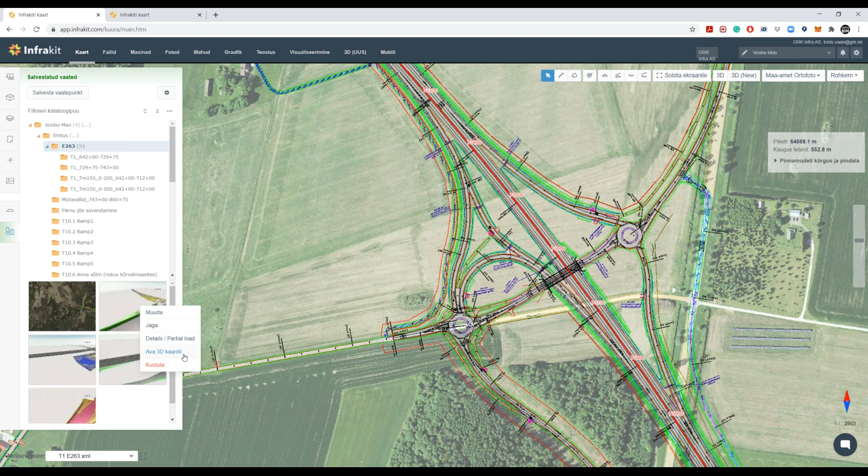again, here is this Võõbu viaduct. I don't have the viaduct IFC model here right now, but the overgoing asphalt model is here. We can take a look at some more.

This one is Kurba viaduct. Here is a small road that goes under it. And here it's going to be, how to call it, an evaporation pond. It's a pond and it's supposed to evaporate all the water that is going to be inside it, because here it's coming inside and going outside also.

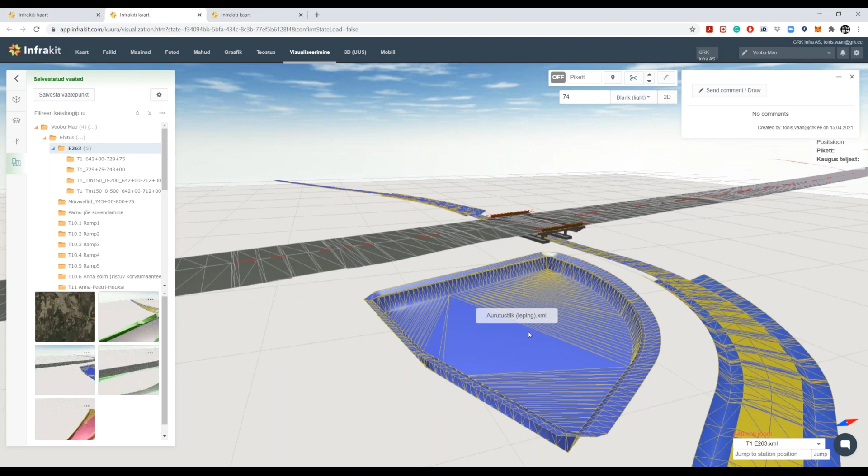And here we can see two more bridges. This one is the main road. This one is Kükita bridge, and this one is Kruusiaugu bridge. Here we have Pärnu River, which goes under the bridges. And here I have done new models because we have to change the river flow a little.

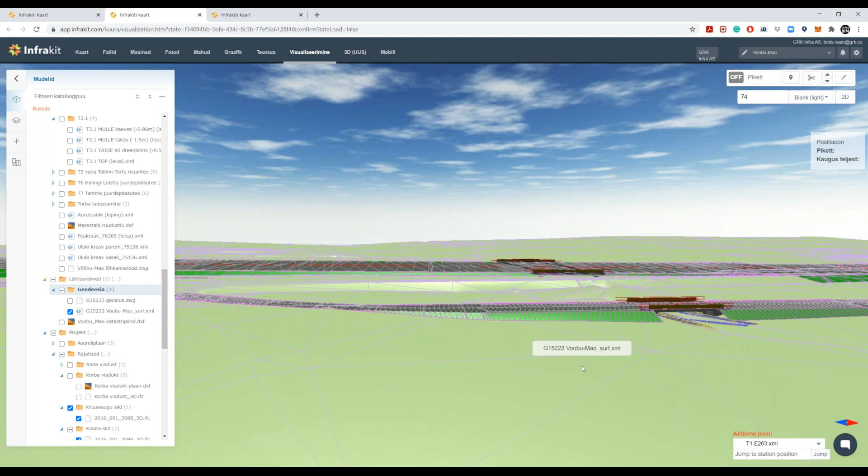If I turn on the existing ground model, try to find it, you can see we have to change this one, and off it. Also, if we turn on this wireframe, it is good to take a detailed look. Also, we can see here is the old main road, and the new one is going here. And here is the ending of the new main road.

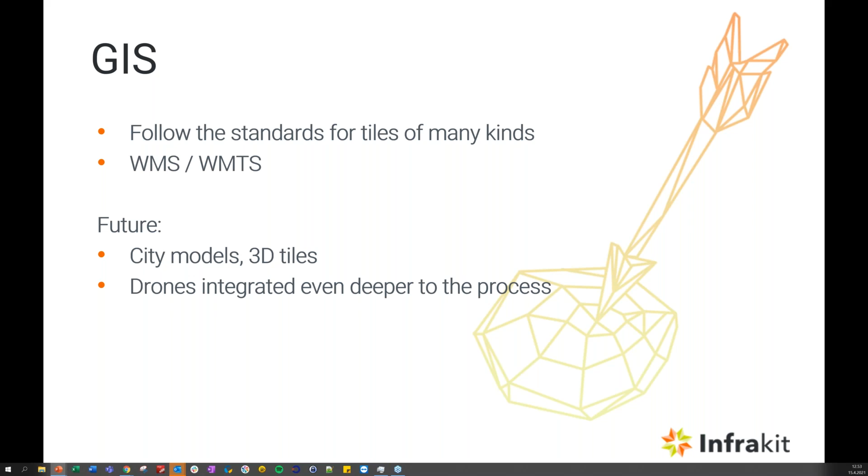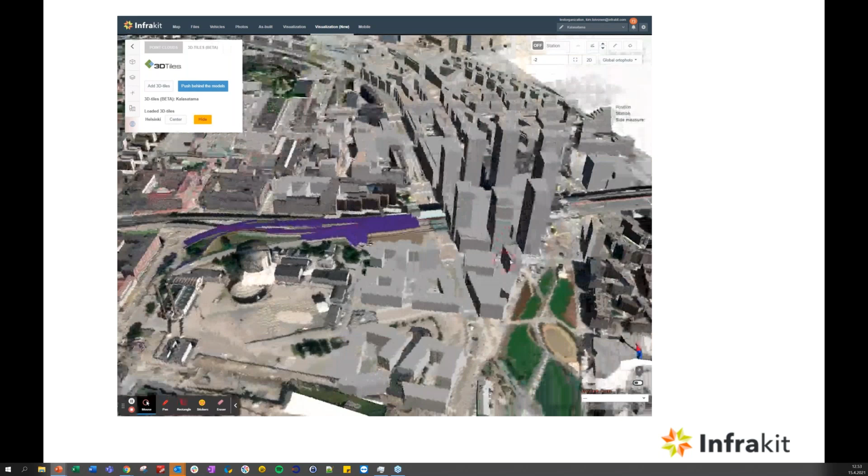In this presentation, I'm bundling drones into the GIS basket, and I have an example. This is not in a released Infrakit version yet, but something soon to come. For example, when you are building deep in the cities, that is one of those trends, people are focusing to live in the cities, and infrastructure is built in the cities. So it is convenient to make design work and construction work so that new designs meet the 3D reality of the city. Here you can see the city of Helsinki as an example. This is open data available by the city.

Then a few words about building information modeling. Of course, LandXML is a great workflow that we can integrate to a lot of field systems like grade control and surveying. But especially if we look into the design segment, it's something that will take major leaps forward in coming years. Currently we've been focusing on expanding the functionality and making a more comprehensive IFC library for the current 2x3 and 4 series IFC models.

But what we really look forward to is that IFC will expand beyond rough concrete structures. Today wherever you see concrete, it's mostly IFC stuff, and when you see gravel or sand, it's probably LandXML models. But in the future, IFC will be able to represent a lot of different disciplines, so it will be possible to get full-blown projects in IFC models. It is interesting to see this development in buildingSMART.

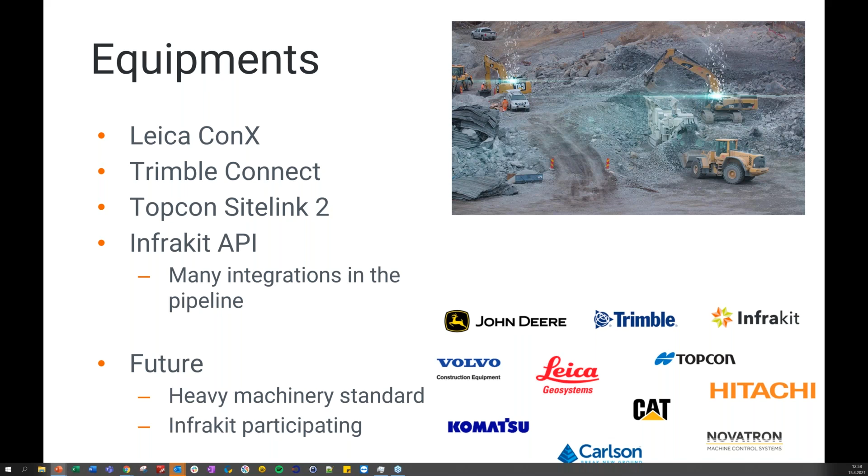Then one perspective is Infrakit apps. This is very important for us because the mobile apps are the viewport to the information for people. So when you have those workers down in the pit, where they look for the drawings, the PDF documents and 3D designs, they of course need their own tooling for that, and Field App is our solution for this.

So it is possible to visualize the information office people see and machine operators see in your smartphone. And of course, when we are discussing people, UX is the big deal. So we want to make it even more user-friendly and also tidier. We have a new UX design in place that we'll introduce for both iOS and Android platforms in coming times.

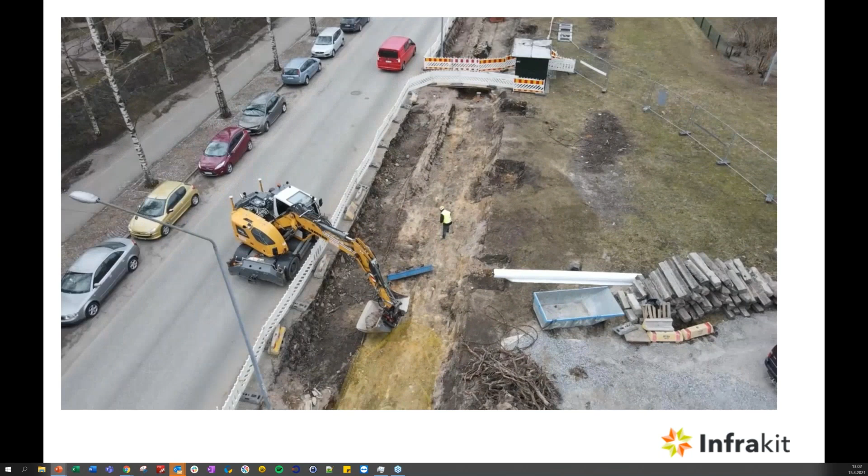And of course, the beauty of the solution is that it's not only in Mikko's phone now, it's available for the whole team. So you can immediately see in your home office that, okay, we have a problem. We have a guy lost. Let's do something about it.

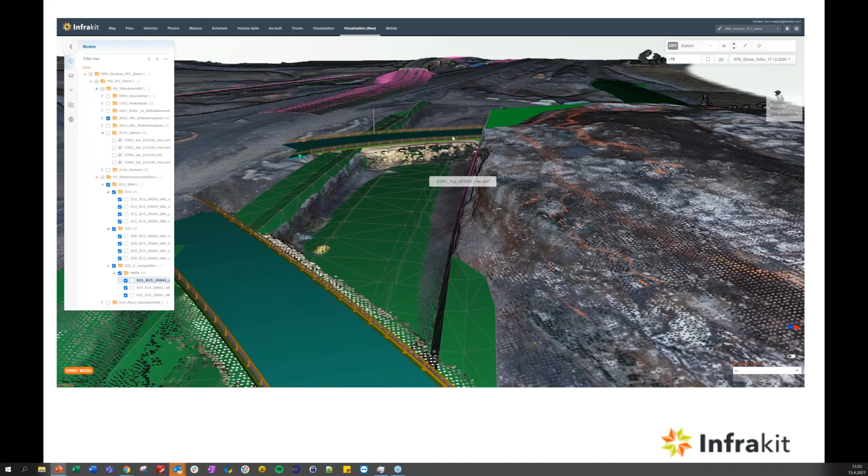And then another one, speaking about situational awareness. Point clouds. This is one of the improvements from the beginning of the year that we have implemented together with our partner Pointscene. We are streaming point clouds, and in this case it is a rock excavation. The green is the model for the excavation, and the gray that looks more like an actual ground is the outcome of the drone flight.

So as you can see here, the blasting has gone pretty well. Not too many spots to hammer out. So we can get a nice visual view available for the site foreman and owners and whoever are part of the project. So drones and 3D photos, point clouds are a really good way to bring those sites alive. And I think many times you can see a better view of the site from your home couch than by entering the pit, when you can see all these plans and actuals combined in the same view.

And also something we developed quite recently, we made a little bit more convenient way to look at those cross sections of those sites with all the data available with the IFC model, LandXML model, and point cloud at once.

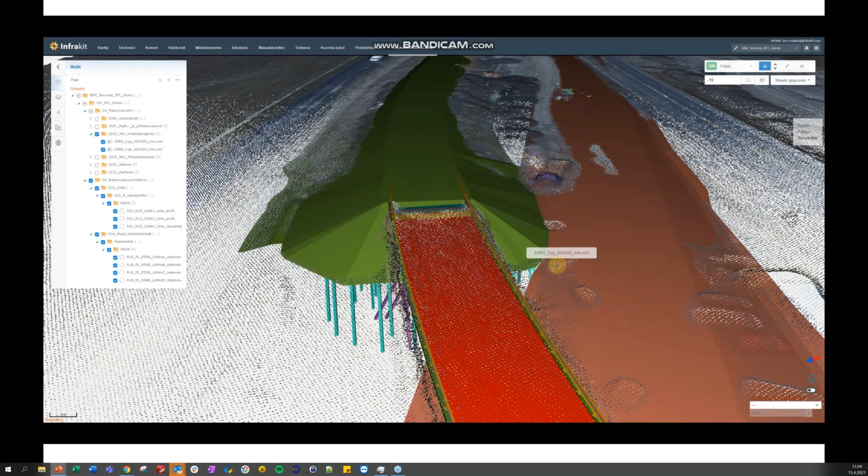Okay, then we have one basket of things that I call non-functional, something that is not directly visible for a lot of our customers, but something very crucial to our business. And one is of course the scalability aspect. So we are looking forward to scale to more countries and more continents. So it means that we need to offer our services nearby our customers. So we need scalability. We've been working on that the past 2 years quite a lot actually.

And another aspect is that Infrakit is becoming a part of the enterprise architecture of construction companies especially. So think about the whole ICT tooling and how to actually harmonize your processes in a company. You need to fix some tools and some processes, and once you go there, one crucial thing is the authentication. And one thing we are now working on is the federated identity, so that you could actually use your personal company login to log in to Infrakit as well.

That makes it more convenient for ICT managers to keep up when people are coming and going not only to projects but into the company and out of the company.